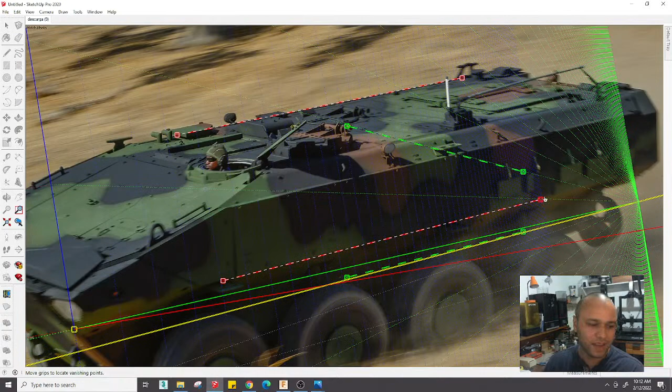Hi everybody, thanks for joining us. You're really gonna like this.

So two lines that you know on the model are parallel. So here, this line and this line, we know that in the real model are parallel. We also know, and it's also important, that they are as far away as possible. You don't want to, for example, use a line over here, because the photo match won't be as accurate.

Okay, so now with the green markers, we need to do the same with the lines that are 90 degrees from the previous one. So for example, I know that this one here, from this vertex to this one, in real life, this line is parallel to this one. The picture is a little blurry, but

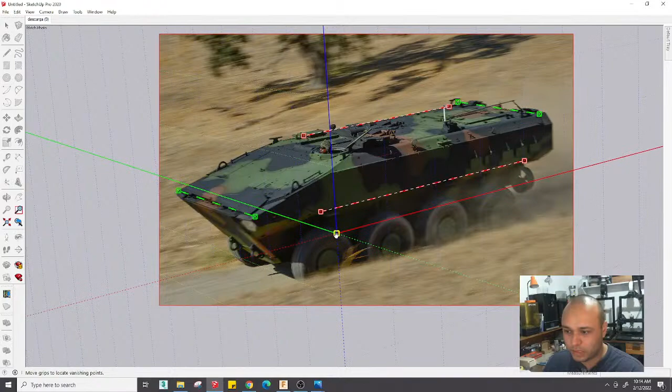The blue line cannot be adjusted. It is calculated from the position of the red ones and the green one. So this is really good, and this one matches here and matches here. It means we're doing a good job on the photo match.

So this is it for now, and this yellow point will mark the origin of the model. Let's set the origin, it can be here. Okay, click, right click, just done, and we're done with that.

So right now, this view on SketchUp is matched with the perspective of the picture. So when we start drawing here, the models are going to be on the same perspective. For example, let's start drawing this side armor.

It's a little too low. Well, the picture is quite blurry here. Let's check something else.

So for example, in this picture, you can see that the back of that plate is not at 90 degrees, so it has an angle. It's probably, for now, let's just assume it's that angle. We're going to check that later on.

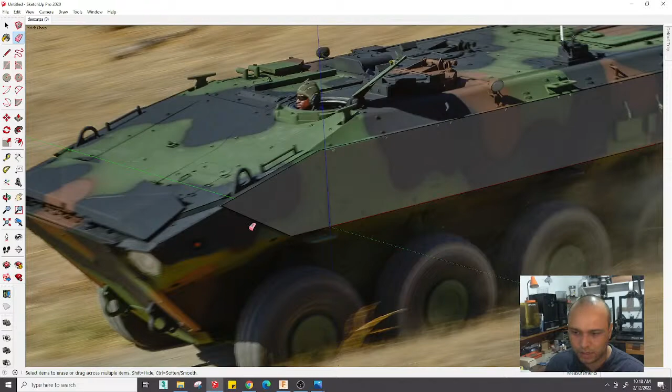Let's check if this face is on the same plane as this one. Let's check on the other pictures. It seems to be on the same plane. It only has like a division there.

Let's check other pictures. Yeah, it's definitely on the same plane. It only has, I think the interior goes here, and this is just an add-up. But whatever, we're gonna model the exterior part.

In this version, yes, this goes out a little bit. So we're just going to follow this line. And here, it starts, not on here, just a little bit on top.

Yeah, just like, not sure if you're getting that on the video, but there's a slight color change here. That's where the face actually starts. Okay, so this one is this.

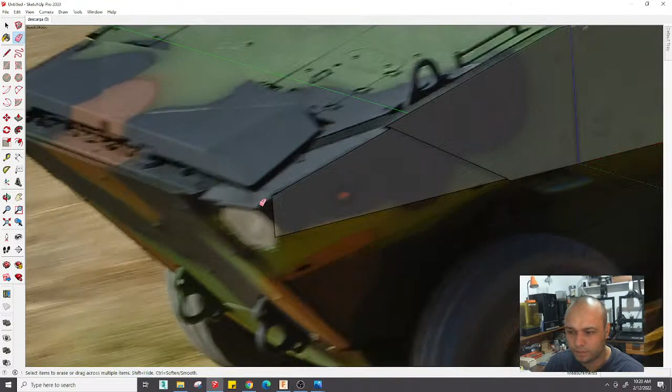So we may leave it like this for now. Oh well, let's just draw it and we can adjust it later. Okay, so far this is what we have.

Now let's extrude this way to the other side. Okay. And I'm going to divide it in half.

Right on the middle, I'm gonna make this a component. This will allow that any change I make on this side is going to be updated on the other side. For example, if I draw one here, it's going to be on the other side as well.

Okay, here it's looking good, so far it's looking quite nice. So let's finish this upper plate.

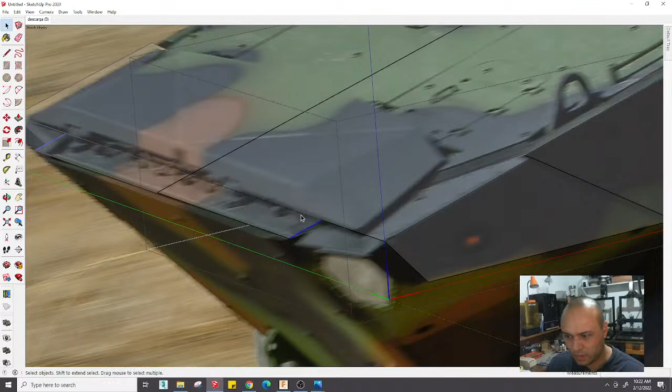We know for sure that this one goes this line up to there, goes here, and at least to here. Let's check on the other pictures how this detail works.

So as you can see, there's a little bit of a triangle. So this part is on a different plane. This one makes a little triangle here.

Yeah, you can see that in this picture. Check for another one. Uh, yeah, there's a triangle.

These little details matter a lot because they seem to be very small, but they're actually just the result of combining the big volumes of the vehicle. So they matter. So like I said, it goes here, so you want to make a triangle there.

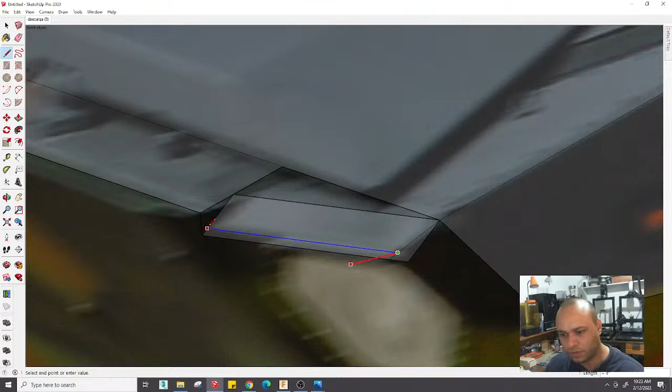And at the same time, this one goes to the inside. Yes. We're of course going to adjust, fine tune this on Fusion, because there we can match the geometry better. Sometimes, oh, I wasn't working on the component. Let's go inside the component.

So this one here goes down a bit. Okay, so we're actually going to draw this one. That one is this intersection. So it's looking great, looking good.

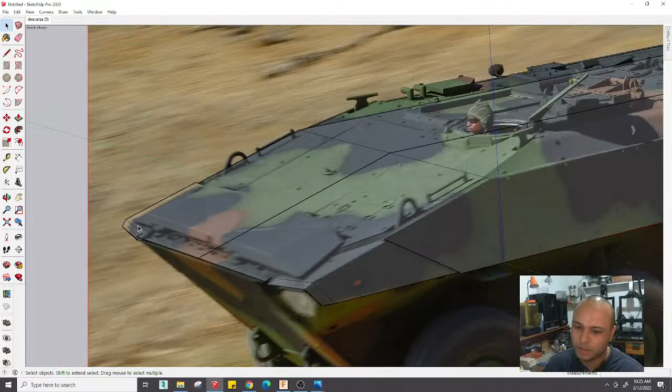Okay, now for the little bit of guessing work. Oh no, let's do something else first. So we have a major volumes done. Like I said, this little difference against the pictures can be do a lot of things. Let's try to make it work.

For example, if we change this one a little bit, maybe the center is off. I think that's probably it. I think the center is off.

I know it doesn't seem much. I totally get that, but it is really important to make that work, even for really small, really small difference, because the proportions is what matter the most on a model. To be honest, details are easy. Make these bolts and these hooks, these windows, all the stuff is easy. The hardest part is to get the proportions right.

So once we have a volume, we can start matching other pictures to see how good this volume is against the other pictures. So let's match a new photo. Say for example this one. This one has what we need.

Okay, so on the model, the origin, we could have changed this before matching the pictures. It doesn't have to be the same origin, but it's gonna work like this for now, so no problem. And we're still matching two lines that are parallel on real life. It doesn't have to be the same lines as the other picture.

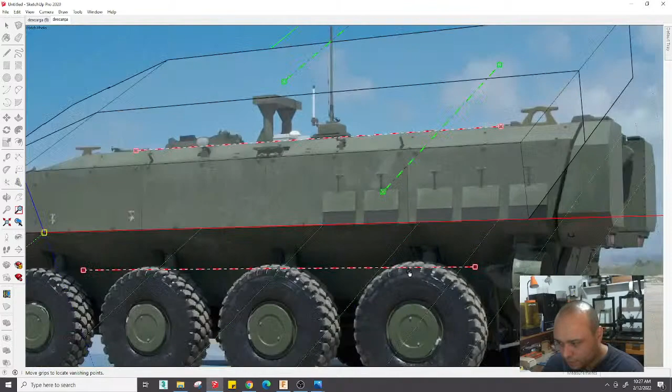If it is good, if it isn't, it's no problem. For example, I'm going to use this one. Not sure if you can see it on the video, but there's a slight color difference there. It marks where the two faces encounter. We can also use, for example, let's use the lower part of this, and let's use.

We could be tempted to use this one. It might work, but like I said, it's too close to this one we have. It's better if we put it all the way here.

Maybe we could start with this antenna, with this detail that is right here, and we can double check if we're good. For example, you see the blue line match the vertical antenna. That means we're on the ballpark. We're close. So let's match this.

Remember that this origin point was a little bit, we're going to see that on the image because it was a little bit back. So right now for the scale, we adjusted here.

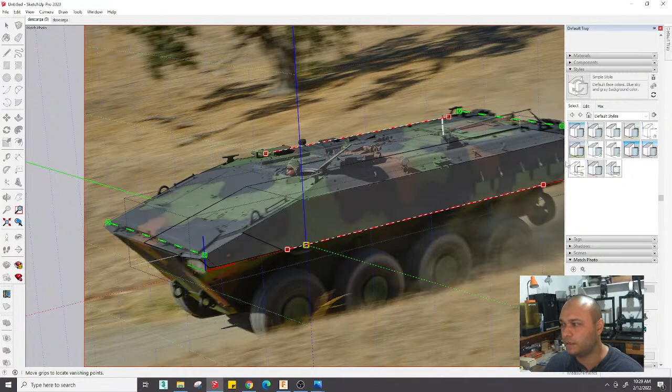Again, this is really a lot of guesswork. So you see, for example, this one, now we match here and here, we're still good. We're still good there. Maybe we can adjust the width of the vehicle.

Maybe we can adjust, we can adjust it like this. Sorry, like this. Oh, we're so close.

Oh, oh, SketchUp is in inches. Let's change that. As you might have seen, I'm not using any dimension. I'm just going for the picture. That's what is important to me right now. To get the proportions right, I will adjust the dimensions later, the actual dimensions.

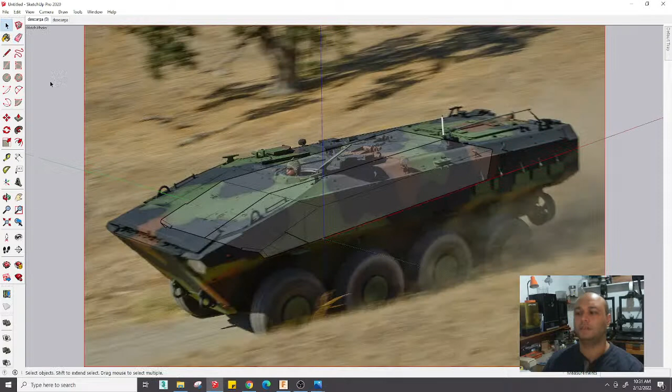This is just to get the midpoint. Okay. So we're really good here, and we're really good here.

Let's just... I think this little difference is armor plate that is there. Like I said, we're talking about a tenth of a millimeter on the final scale model, so it's no big deal. The proportions are really, really on point.

Okay, really happy with how it's turning out. Now we need to model the roof. Should be easy - the boxes on the back, the bottom, and the wheels. Just big volumes, no details right now.

Before that, let's add some dimensions. I got these dimensions from a military webpage. This is a prototype, so we're not sure where this was measured - whether it had this deployed or not, or if it's counting for this little backpack it has. So don't take them too seriously.

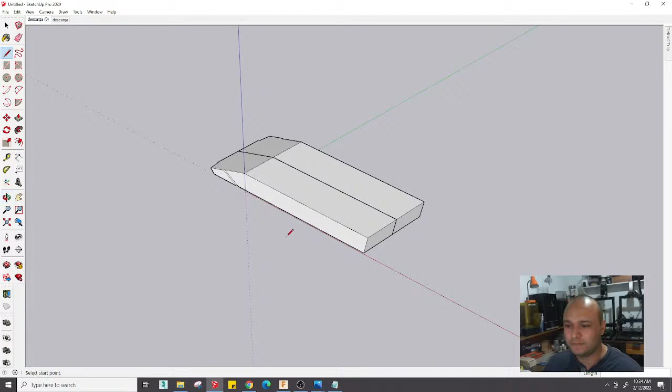The first thing that it reports to me is that maybe that 3.1 is without the armor. So let's discount a little bit here, and let's draw these volumes. Let's see how much we have now.

8.9 - this is great. Awesome, so we have this. This is just really great. Like I said, this is a very easy model because of the boxy nature of it. The real challenge is going to be the Ferrari Dino. So this is just a warm-up.

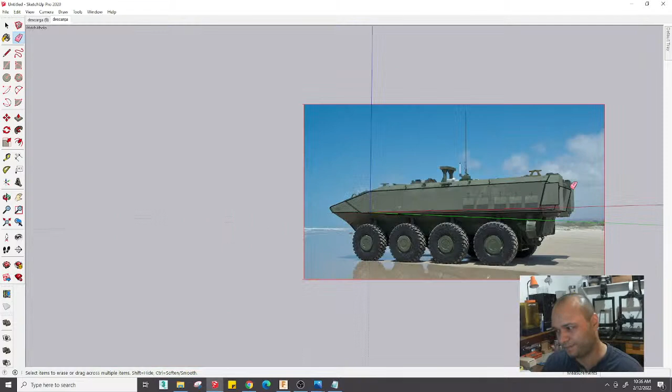Okay, so let's draw this one, let's copy it to the component. Oh yeah, almost forgot about that - preview one. Okay, save now, almost forgot about that.

This angle we're going to be matching it. We're going to match it with the other picture. But it's okay for now.

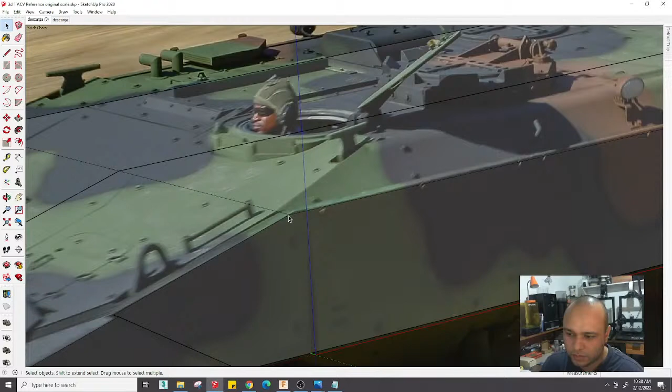So the roof starts - it doesn't start here, it starts here because of the armor plate. So how could we do this? Let's match this height. This line goes over there, and we're just going to move it in the green direction so we get a match. See how it looks - it's not bad, but we should match this face.

Okay, so we're here, we're good here. So probably the weird thing is this angle - it has a curve there. This is supposed to be like this, but this is a really painful thing to draw on SketchUp, so I'm just going to leave it to do on Fusion.

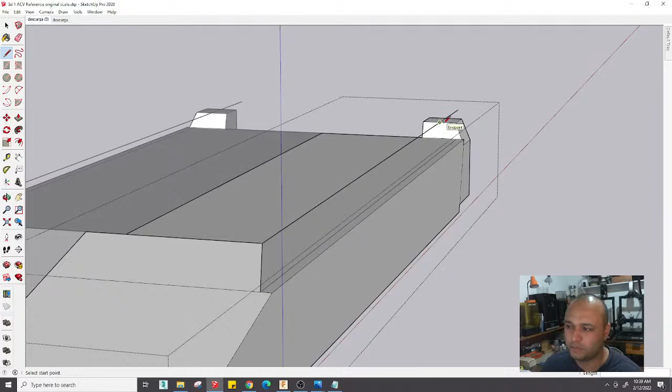Well, this is definitely too much. Definitely too much. This angle is way too much. I think we should be closer to this angle.

Let's check other pictures. Yeah, no, yeah, yeah, here it's more evident. Seems to be about 45 degrees, so let's use 45 degrees. Oh, so this one is closer - 45 degrees, okay.

Let's see how much we have here - 45, oh okay. So that was a mistake.

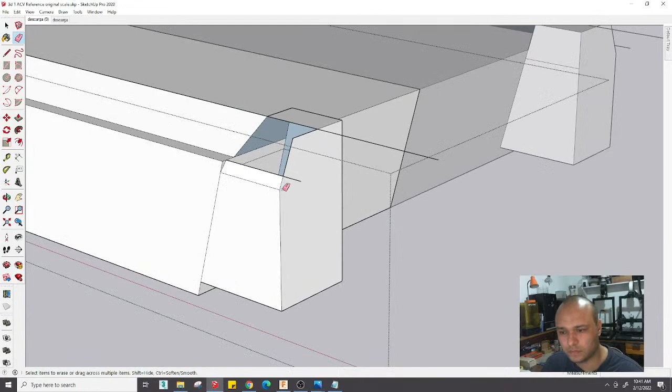Please remember all this is not actually the 3D printable model - this is just reference. So we don't need to lose our head here with these small geometry details. We just need to make sure it's as accurate as possible. All this SketchUp glitch is not worth the trouble to make it work.

So now this one looks much better, you see? You've got a small face there. Yeah, this looks great. And the difference we were seeing is that this is bigger. Okay, awesome, so we have that.

Oh sorry Toby, I haven't checked the question. No, this is - we're just doing the reference model here in SketchUp to use the photo match utility. Once we have a reference model on SketchUp, I'm going to use that model as a reference in Fusion and actually model it again using Fusion. But since Fusion doesn't have this photo match utility, I don't see how I could do this on Fusion to photo match a perspective. I don't think there's any way to do that. If someone happens to know - I'm pretty sure there isn't. So far this is the best workflow I've come up with.

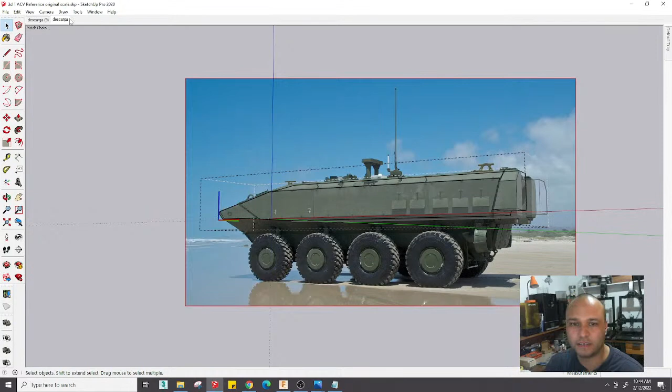Okay, like I said, this difference is really hard to fix because this portion of the image is so small that any change on the guides is going to make a big difference. So it's not worth losing your mind over this. The important thing is that we're getting proportions right between pictures.

So now let's go to the front. The front is the one that we're missing. Let's see a few pics here - that detail.

On this picture, the vehicle seems to have an add-on. I'm not sure, but it seems that the real plate is on the back, and there's another armor plate here that makes this part longer. So I'm not going to use this picture for reference.

This one is blurry, but you can see that the plate is an add-on, and the real line of the body is on the back. Also, you can see that it has a little bevel on the front plate, and this picture is more clear.

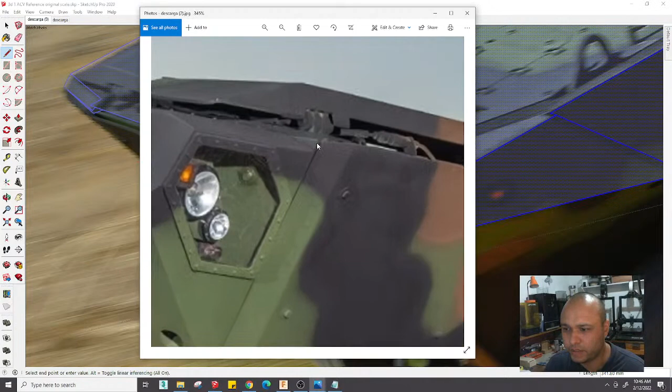So the triangle that we were speaking of before is here, and the armor plate is in front. So this little triangle is actually this one. I really don't want to move anything here, so I'm just going to move.

Whoa, whoa, whoa, move this a little bit here. Everything is still matched. Okay, so like I said, that triangle is here, and that triangle finished with this angle, the angle of the front armor plate. Right now it's just a random angle.

So let's calculate this angle somehow. One thing we have for sure is the midpoint here and the midpoint here. We could draw that, we just find the midpoint here, we already have the midpoint here. It should be a little bit back, and that line will be the angle we need. So let's do that, let's go below here.

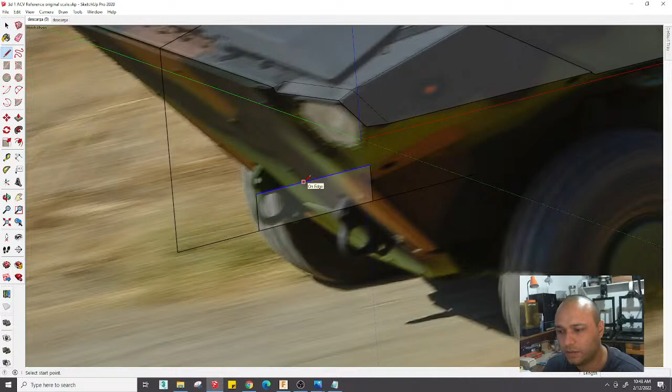Like I said, this involves a lot of guesswork. Right now I'm trying to imagine a line that goes from here to here. The intersection of that line with this one should be in half, on the midpoint of the new line that we need. Like I said, it's a little bit on the back because of the armor plate, so I know this is kind of hard to explain.

Well, of course you're seeing 20 years of experience in this little detail here. It involves a lot of, I don't know how you say that in English, geometry, analytic geometry, to get this guess right. But that's the way it is, it's a little bit of guesswork involved, a little bit of imagination. But the important thing is that we get a start point of this angle.

Now we can check the other picture. Well, it's not actually this one, but this one is also at that angle. Maybe we can check. It's quite close to this one, you see? Seems to be right.

The real test is for us to match this picture with our model. Let's try that. So like I said before, you can place your UCS, your origin, anywhere on the drawing. We're gonna place it here. Let's try to keep it on the same direction. And let's start a new photo match.

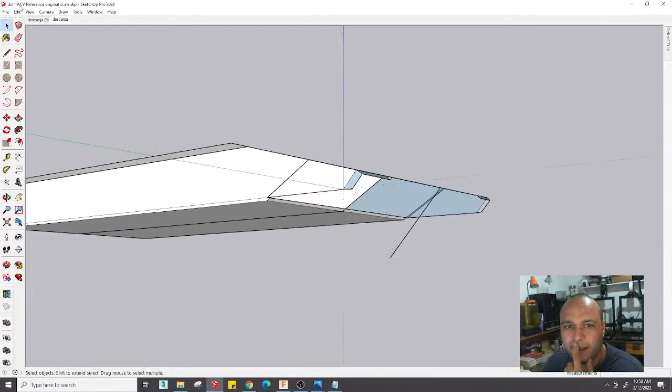Like I said before, like it is on the description of the video, these videos are going to stay online for a while. So if you can't catch it right now, it's no problem. It's just my way of work is like this. I like to just sit down and work for 5 straight hours. I don't like to take too many breaks because this is a lot of mental work.

So you do get tired, but also you feel like you're in the zone at some point where all the photo is matching, all the geometry is working. So you just don't want to ruin that moment.

So I just want to focus on this part. Like I said, this is really hard to get right. It's very, very, very difficult. We also don't know if the picture was cropped, we cannot be sure about that. But we're just trying to make it as best as possible.

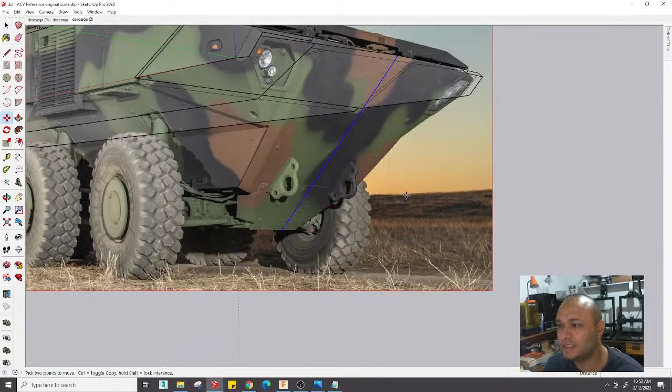So this is quite good, quite good. Okay, so there. Well, it seems that we were almost right. You see, all the bolts are pretty much at the same. Yeah, this is definitely going to work. Let's just adjust it a little bit just to get it perfect.

You see, the difference is 0.5 degrees, so it's really not much. But like I said, for the model, all those little proportions matter a lot. That can be the difference between an okay model and a really good model. So this angle is the same angle here, and it's the same angle here, and of course it's the same angle here. So I'm just going to erase this.

Oh, I wasn't drawing on the components. No problem, it's no problem. Okay, let's erase this one. Let's do the same as before.

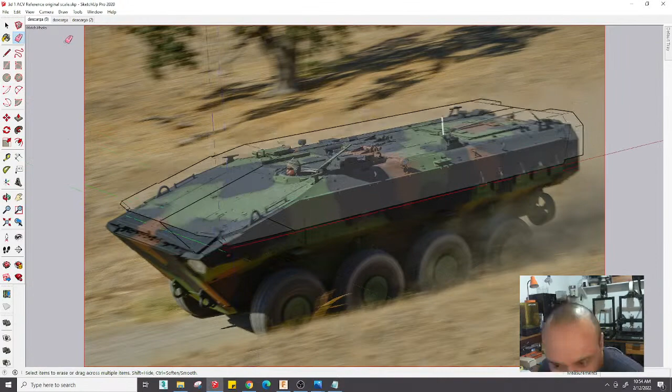It is match. Good enough there. Really good here. So there you go. It's quite nice.

It might be a little bit too small, so this just means that this cut is a little bit to the back. Let's just do that.

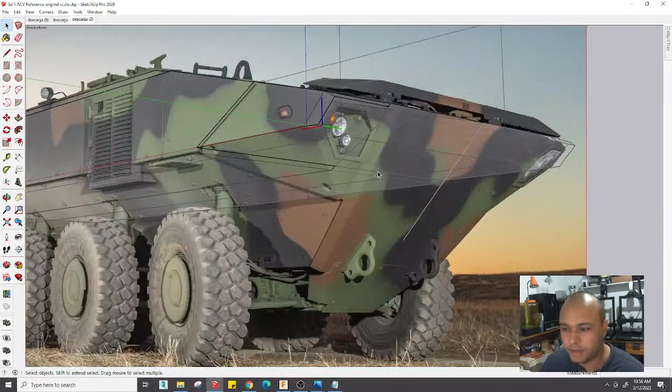Okay, we have lost that one there. Let's just repair. Okay, now it looks great. Okay, so let's keep going with this.

Remember that we were on the back, so the line is this one. So we have this point here. Check it out. It has a little bevel here. So the face actually starts from this point. You cannot see it that clearly here, but it's from here.

Let's just mark that. And it should be the same face, right? All that should be on the same face. Okay, so this is what we have, what we need. This point here.

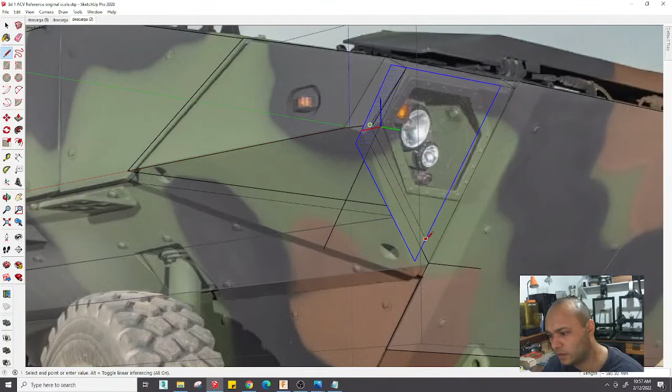So this point here is actually this one. The difference is just a matter of the photo match.

So okay, now we can draw the next face. That is just going to be this one.

Body has to be on this plane, so I'm just going to extend this plane, extend this line. There you go. It's really nice.

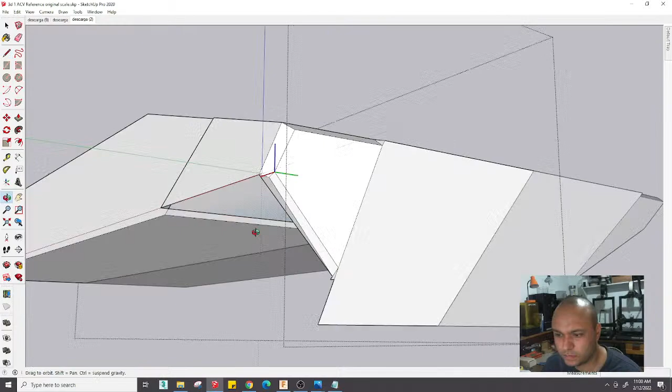Let's not worry too much about this one. Let's do the bottom, that's more important. So we know that this one goes here. This one goes all the way there. This one goes all the way here.

Okay, and we're going to start this one from here. Oh sorry, wrong direction. Okay, we're going to adjust that later. We just need to check this angle.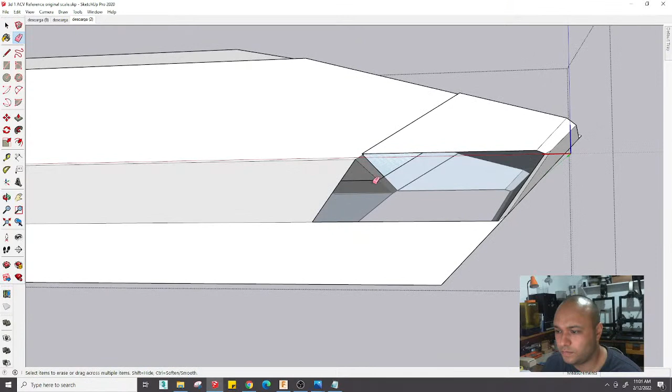Almost done. And we also need to solve this geometry here. It's really not that important because like I said, we're going to actually draw this again on Fusion, so it makes no sense to put that much time on this. The important thing is that we need to have a face here. That's it.

And here, you're just going to continue this angle, close here, copy this to make the plane, and draw the intersection. Let's clean up this a bit. And we are done with the basic model.

Okay, I'm just going to finish it all the way here. Oh sorry, wrong direction. Sometimes it's hard to draw in the same direction, so just copy it that you know is on the right one. And that's it.

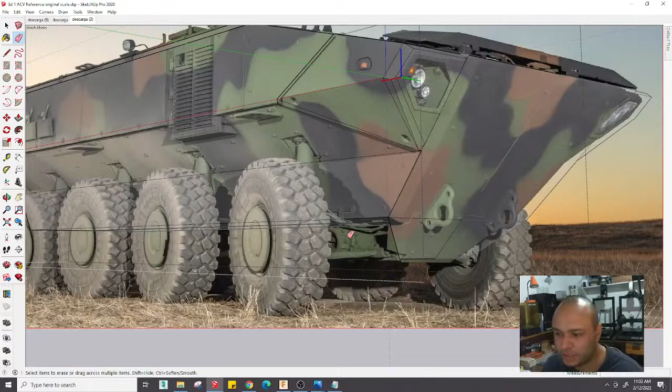The final model won't have this many details. It's going to be a model for wargaming, so let's just see how much detail we can put on the suspension.

So there you go. This probably doesn't finish like this. I need to see more pics. But for now, it's quite good.

Now I just like to put some markers on some details that I know we're going to need later on for modeling. Again, this is just reference, so this is to have the position correct.

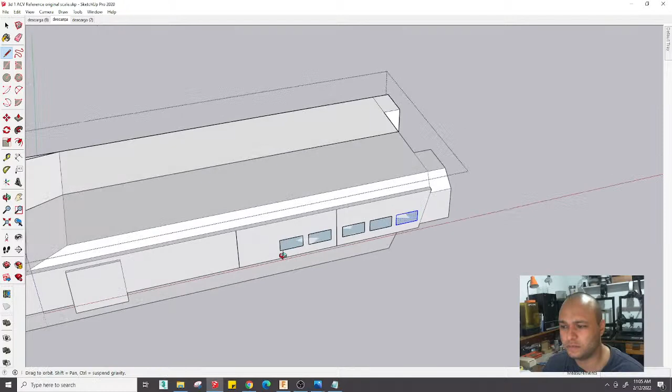For example, maybe these windows here, the armor division, that's important too. Oh, I'm working on the wrong side, sorry for that. And this one is not on two sides, so let's fix that.

Okay, now it's working, it's good. As you can see, there are some variations on the side armor. I think I like this one. So it's pretty much on top of each wheel, except for this one, it's a little bit behind.

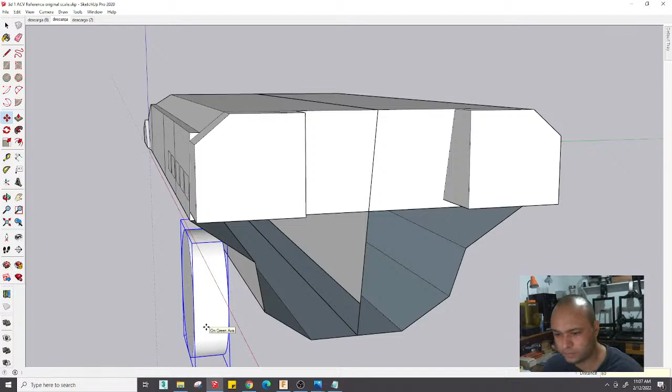Mhm. They all seem to be on the same distance, so it's working quite nicely. Oh, sorry. Yes. Mm.

So this is pretty much it for now. Of course, this model can have more details added later once we're modeling, in case I need the position of one detail, maybe the colors here, not sure. But for now, this is really good, really, really good. Really like it, how everything matches.

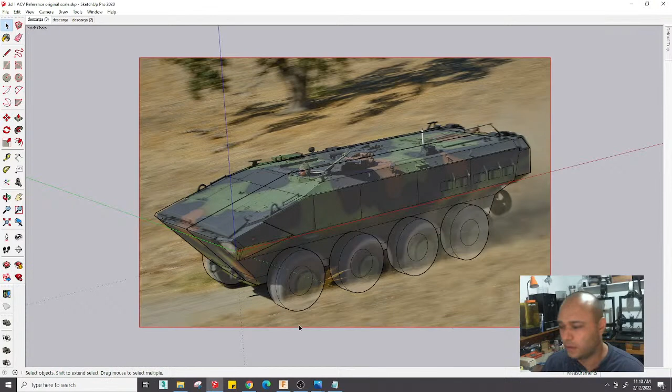Okay, we're 1 hour in. I think this is a really good result for 1 hour of work. This is going to speed up the modeling in Fusion a lot because we won't need to go back and forth from pictures. So let's start with the Ferrari. That's going to be a challenging model for sure.

Save, template, millimeters. Okay.

So for the Ferrari, let's look at the reference. This was one of the reasons I picked this model, because I found this collector web page that has these awesome pictures of this vehicle, so we won't have the same problem as with the ACV, where we weren't sure which version we were looking at. This is the version, and all the pictures correspond to the same vehicle.

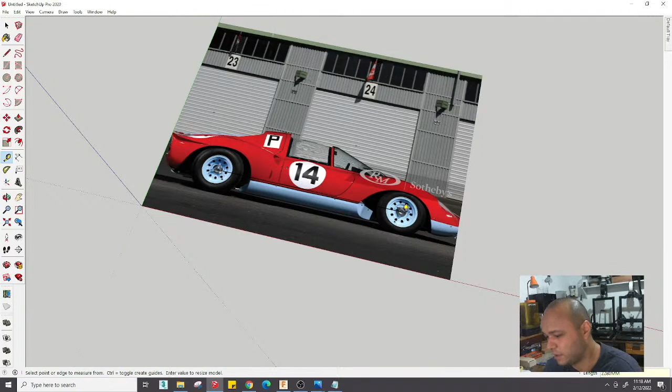The wheelbase is 2,280 millimeters. So let's set it to 2,280 millimeters. There you go. Now let's just rotate.

Now we're going to draw the wheelbase. The front wheelbase is 1,392 millimeters, but we only need half. So this is the front wheelbase.

And the rear wheelbase is 1,414 millimeters, we only need half. So this is the other wheelbase.

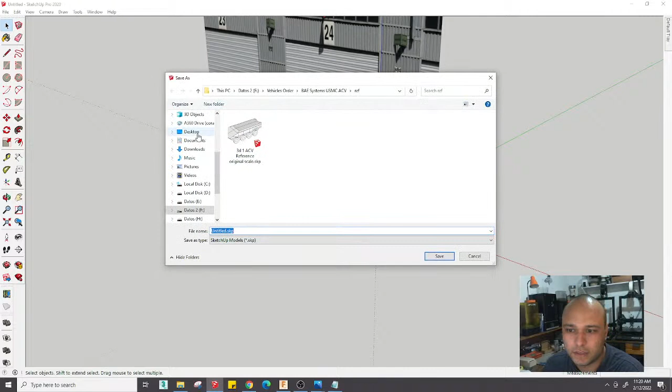From these pictures, we are going to scale them to each wheelbase, and use them as the profile of the bodywork on that plane. It's going to be clear later on, so let's just do it, and let's save this model.

As you can see, I have already done this because I really didn't want to be too confused for this explanation, but we're doing it from scratch anyway.

Just try to pick the one that is most at front. This one is a little bit too high, so this is almost perfect. If I were taking this picture, I would have gone down just a little bit more, probably to the same height as the middle of the wheel, just to get as perpendicular as possible to that plane. But this is going to work just fine.

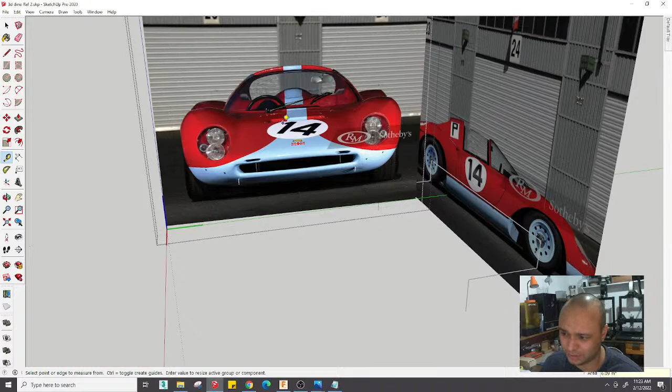Let's make this a component so we can scale this picture only. We are inside the component. So only so you can see it, if I put a dimension here, it's going to resize this. So let's put the right dimension, that is 1392.

And now let's grab it by the middle, put it in here, so that matches quite nicely. As you can see, we are concerned only with this line, this is our main concern, and it's pretty much a match, super close.

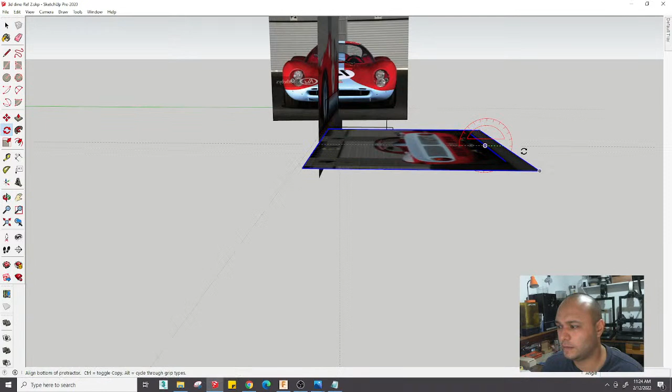Now let's do the same for the rear. Exactly the same, just add the picture, we draw a line from the mid to the mid wheel here, make it a component, put the right dimension on it, and align it with the other one.

So this is great. The only thing is, well, it doesn't really matter, this picture is reversed. It doesn't matter, the car is quite symmetric.

Okay, now that we have these two, let's proceed to do a photo match. Let's place our axes at some point that we know, so it's going to be right here on the top of the door, on the middle of the vehicle. Now let's do the photo match.

Okay, this is kind of hard to see because other pictures don't allow us to see, so let's hide these ones. Now we can do a photo match. Remember, these points should be on the middle of each wheel at the floor. So far, that's what we have.

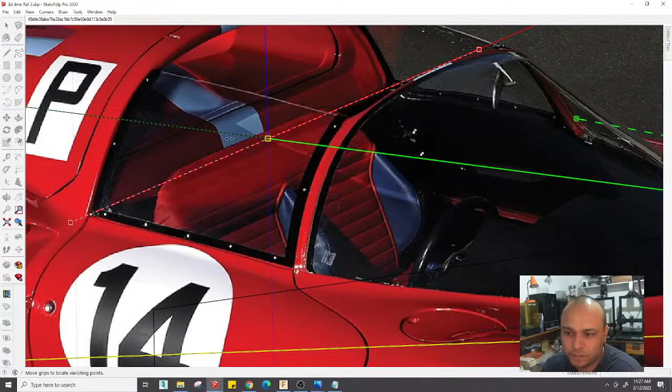Now let's start the hard part. This red line should also be on a line that is parallel to this one. As we said, we can use, for example, from this one to this one, or maybe check. Let's better use this one, it's more clear, it's not so clear here which one is. But I think I see it now, it's this one. Yeah, this one is from the back.

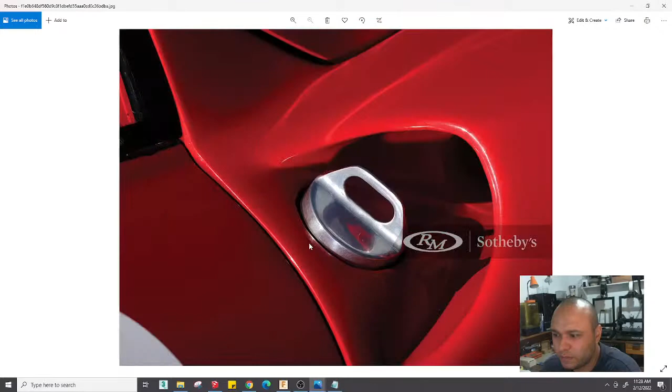And now the really hard part, the lines that go in the other direction. Let's start the guesswork. I was seeing a few artist interpretations, so for example, this line is quite straight, and it is like that on other artist interpretations of the vehicle. You see, this is straight. This is a racing version, but I think it's pretty much the same chassis. Also here, you see that line is horizontal. So we can assume that the mid of all this plane, the right middle from this middle to here, is at 90 degrees. So this should work.

Okay, now we need to have another one as far away as possible. We could use this one from this same point, right? But we know that it's not like this, it's pretty much like this. Oh, we have a problem here.

So the problem is the following: I was using the red ones in the wrong direction, so it should be the other way around. We might as well start again because this isn't going to work. So let's start again. The red ones go here, and the green ones go like this.

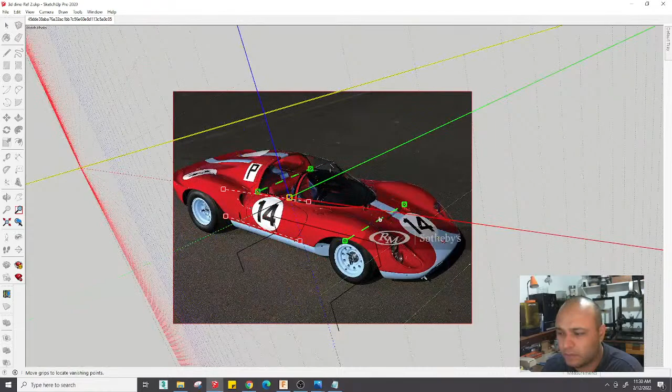I'm just doing it again, that's all, because the model was at 90 degrees, and since I don't want to have to redo the image again, I just started it over. But it's the same explanation.

So from the midpoint here to the midpoint here. Okay, so this red one, as you can see, these lines should be on the middle of each tire. So about here, we're so close. This one is good.

I think this one is a little bit off, just a bit, so even the small adjustments I'm making aren't quite right. We can also check that with the pictures, so let's hide this one. Oh, this is really good.

As you can see, this is almost finished here, it's pretty much a match. I think it's a little bit high, and this one goes, this should be here. This one is a little bit low. Well, it's really good enough.

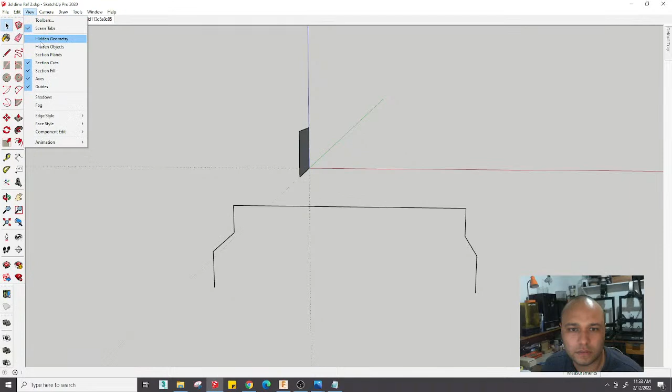So we'll start to draw a few geometry. The first thing I'm going to draw is this plane here. On the picture, we can have this as geometry. It will make things much easier.

Oh no, let's just not do that because we're going to lose it. I think there's a way to change that in the view settings, but I'm not going to mess with that right now. Okay, so let's just draw this here.

Remember that this is just a reference model, it doesn't have to be perfect. I mean, we're trying to make it perfect, but it doesn't need as much detail. So it doesn't matter if this line is segmented, it's no problem.

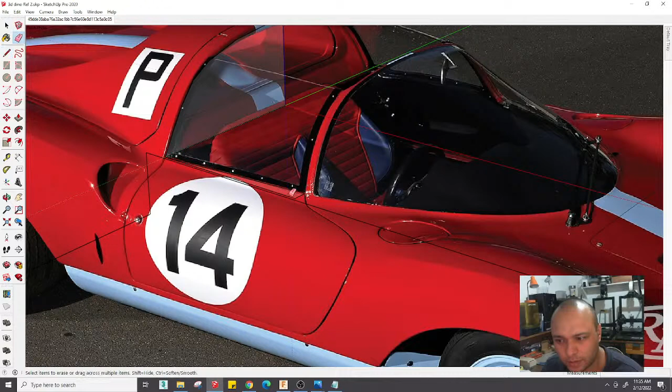So let's try to match. Okay, go. Now let's draw this one, that, like we mentioned, is converging forward.

I don't think this one goes all the way here, because it says, or maybe it is, this is just a cut. Yes, it's great, let's start it.

In a complex model like this, it's even possible that I might have to go to Fusion, draw some surface, and get back here to make the match. It's a possibility.

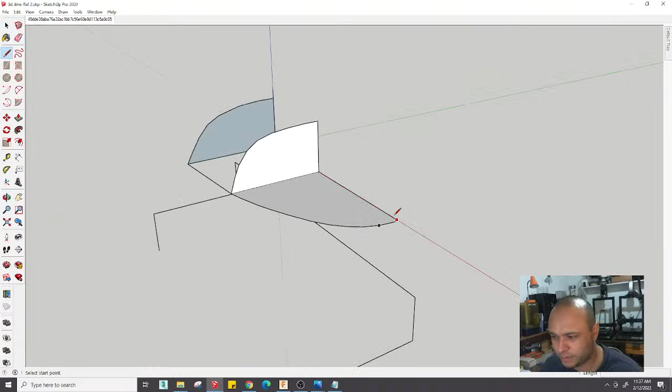Like I said, it doesn't matter if it's segmented, this is not going to be the actual geometry we're going to manufacture. But there we have it, our first geometry for this vehicle, for the reference of this vehicle. So far I like it.

Yes, it makes sense. This is just to have a reference there for the glass.

So this is really good. This is where we can take from this view. As you can see, the photo match was on the cabin, on the cockpit. So that's done.

Let's keep working on, for example, this line here. It's really important because that line is also a section of the vehicle. Let's double check that. Yes, the line is a section of the vehicle.

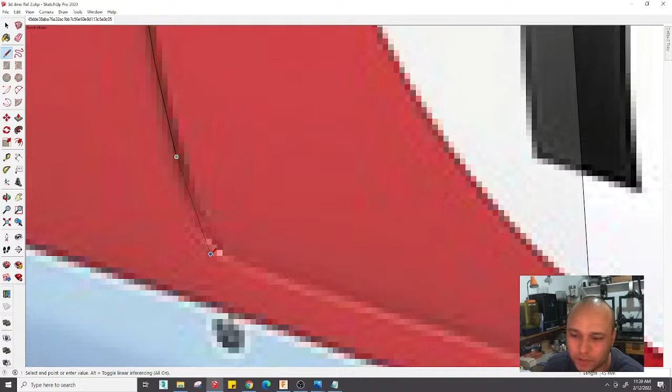Well, there aren't many people watching right now. It's no problem, I know this is a really complex topic and it's a little hard to follow. But like I say, this is going to be online for at least a few months.

I know for sure this is a really advanced topic, so I really hope that whoever is really interested in learning takes advantage of this.

So I'm not liking what I'm saying right now. I guess the section is not an actual extrusion, I'm pretty sure it isn't. Oh, you see, this is what you need to have a plane to draw.

So how far should we go in this one? Let's see.

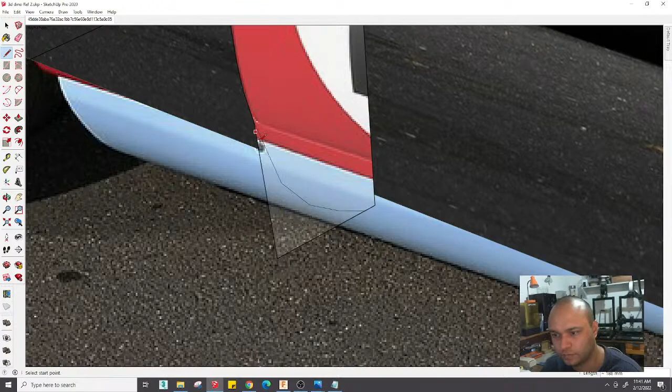This one. So we weren't that far off. It's even really good. This looks much better, much better. Actually, yeah, this looks much better. Let's see if we can find another vertical line or something.

Look, in this picture, it does seem like these lines, at least on the chassis, they seem to be parallel. On the artist's interpretation, hard to tell. At least the door seems to be straight. I see this and I see a straight door. So it should be like this.

But it doesn't seem to be working. So probably straight but not parallel to the other. So like this makes more sense. Something like this. Yeah, up to here. Yeah, something like this.

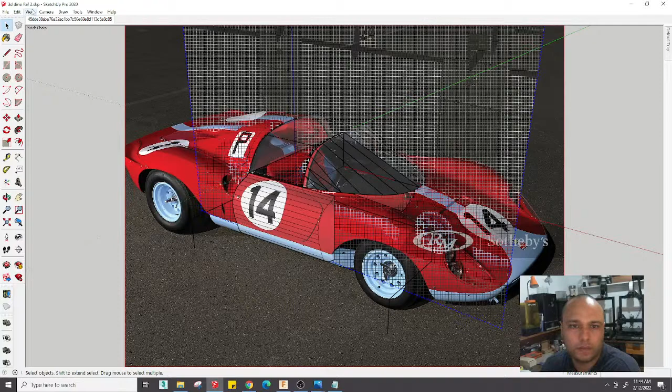Looks good. Let's make it a component. Let's mirror it just to have a good reference. Let's see how far off we are. Oh wow, this is not bad. Not bad at all.

Seems to be like these two curves are too wide on top. Maybe that's true. Let's check with the front pictures.

So yes, they do seem to be a little off. So let's fix that. Remember that in this picture they are a little bit behind the actual plane where we scaled the pic. We need to make it bigger.

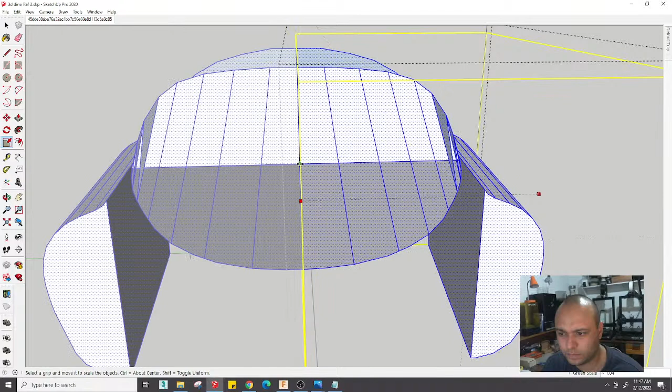This is really, really good. You just need to fix this one. Something like this. Seems to be closer to the real shape.

Okay. Maybe not as — let's always check something here. So this is actually a little bit tilted. It's not like this artist interpretation. So that's why it looks weird.

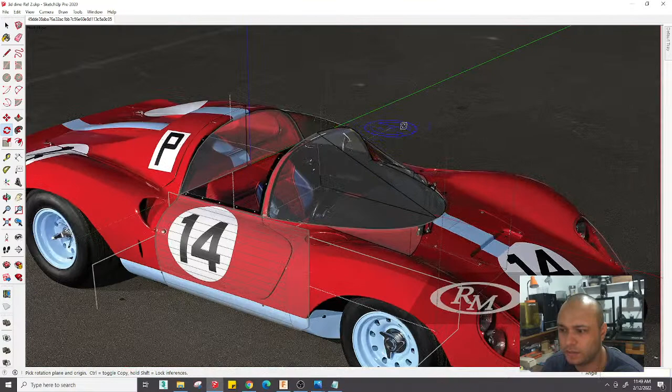See? Oh, this is perfect. Let's just give it a 5, 6, and this is so close. Okay, yes, this is perfect. Really, really good. Actually, the first one was not this good.

Okay, so we have that now. The cockpit is pretty much done. Let's work on other details. Let's work first on the rear light. On the rear light.

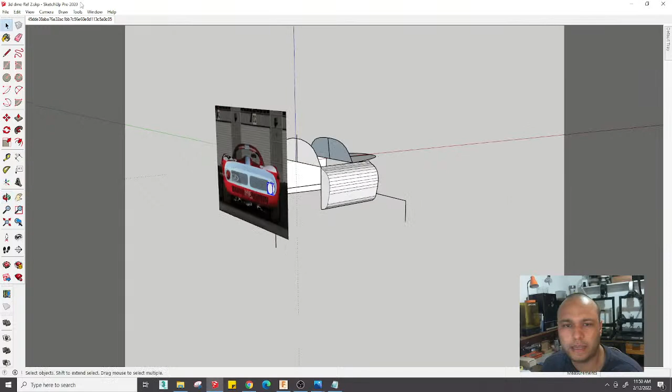Okay, let's just drop them here. Sorry. Why is not this? Okay, here. Okay, nice. Okay, and now just going to match it. This...

They do seem to have a little bit of an angle, so that's super important. Let's see how far off we are. Let's put this one. Okay, so that is the rear headlight, the rear brake light. Sorry, brake light. It seems to be on the right position here.

Okay, let's just do another detail. For example, let's do the wheels. So for the wheels, for now, I'm just going to draw some big cylinders — it's going to be it for now. There were actually dimensions for the wheels. We're here, I think. Well, now I'm just going to take that from the pictures.

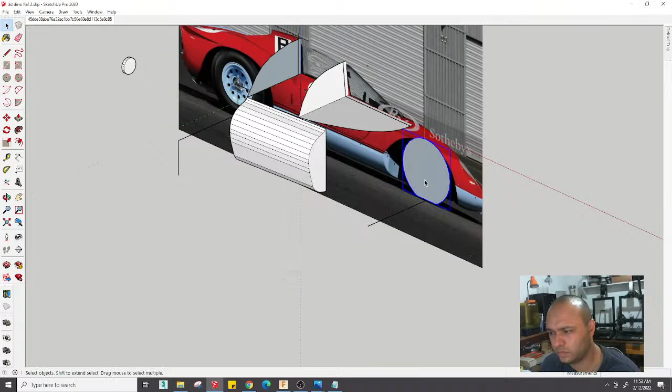So the difference here, of course, is that the wheel is on the ground. So it's a little bit flat there. Oh no. Okay. So the wheel must match here. And, oh, this is really good.

And it matched so close to the other picture. This is really, really good. Okay, let's do the same with the real wheel. Let's check the dimensions. Sure. Yes, good.

So let's make this the right dimension. Let's make it unique. Oh, this is — sometimes I have to use a window material just to see the back of the window, no, glass. Yes, this. So I can see the back of the model on the back, because this one is here.

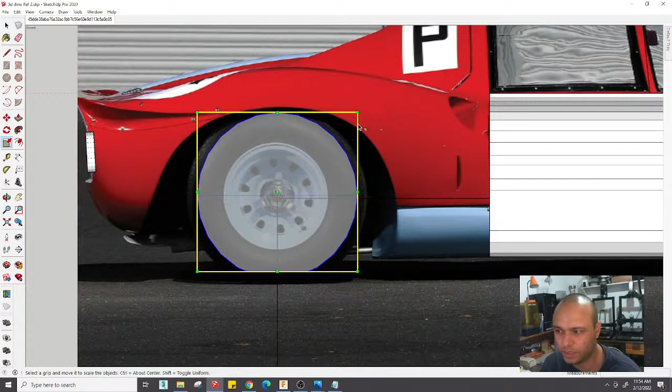From there, you can scale it up and match it. Let's make sure the midpoint. And of course, that wheel is much wider. Well, this is not looking super great.

Please remember the wheelbase also depends on the toe of the vehicle. That's a few things, but 7 millimeters is a good match. It's a really good match. A small difference there.

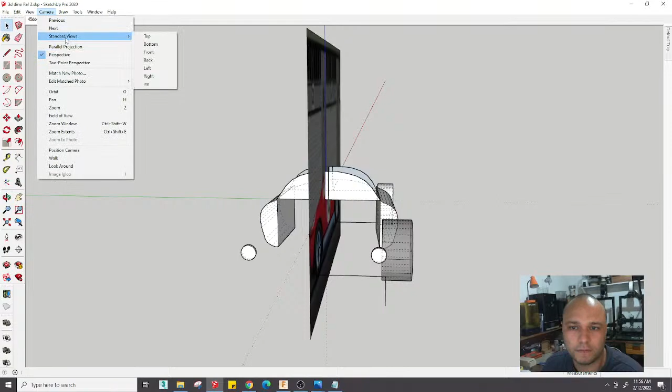Not sure if it is this wire. We're going to match that later. But it's working. We can double check with the image — that was the reference. So we don't need to check that. Let's keep going.

Now let's match the — let's just draw this line here. Okay, let's have some. Let me show you the one that I was making before. It's pretty much the same. Let's just copy these two. It's really good, the fact that they just match. Align them.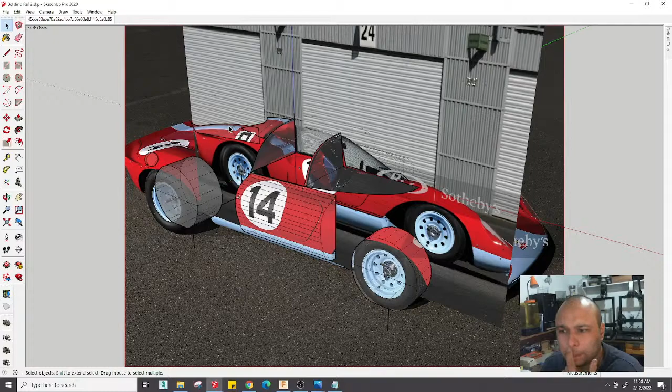Okay, let's double check everything. So the problem here seems to be with the center. Okay, this is better now. So this was just tracing the pictures, no big deal.

Okay, the lights. Now for a little harder one. On this particular model, we have these crease lines on the top of each wheel. It's a very important detail of the vehicle, this crease line. So we're going to try to match them with the photo match. Let's do that.

Okay, first let's hide these ones and just trace them here. Going to trace them.

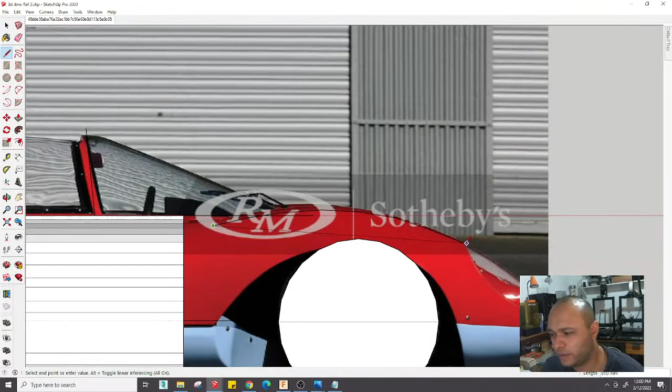You can see there's a little slight color difference there, that's a crease line. Okay, and let's trace this one too. It starts from here. It doesn't go all the way up, it's a little bit lower. And let's just close this and close this so it's easier to manipulate.

Okay, now let's try to match them here. Okay, this one is pretty much a match. I think we need to rotate it in this direction. And this one is close here. I think we need to rotate it in this direction too. Very close, very, very close. And let's see how it's working on the right.

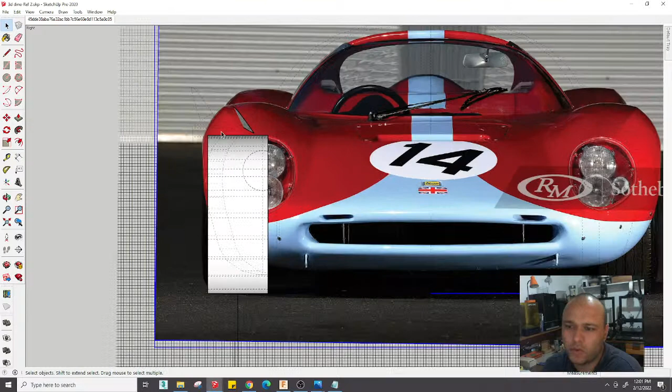Oh, so close, this is great. This is the thing for the front, this is perfect. And now let's do the same for the back. Quite close. It's going to work for that. It's good enough for now.

Okay. Seems working quite nicely. This is working quite nicely.

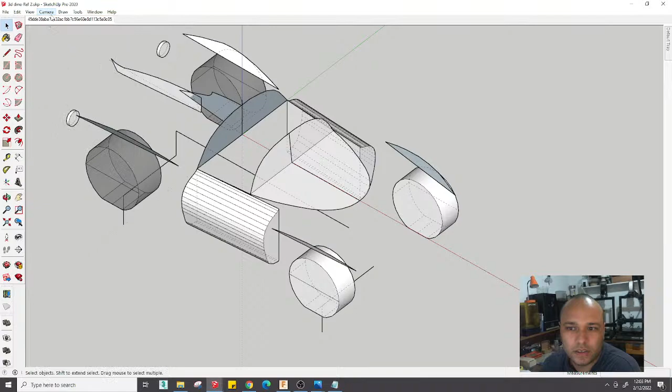So we are 2 hours in on the live. I mentioned that I do like to model more, but like I said, you also get mentally tired really fast. So I'm going to do just a couple more details.

We're gonna leave it like this. Yeah, it's working really good, it's working really nice. Just have this, the top here.

Okay, the other detail we're gonna work on is this profile, this line here. It's really important. So let's check the pictures and see how it's related. So it's not perfectly straight, so we have to keep that in mind, and it's a little bit below the axle line. We can work with that.

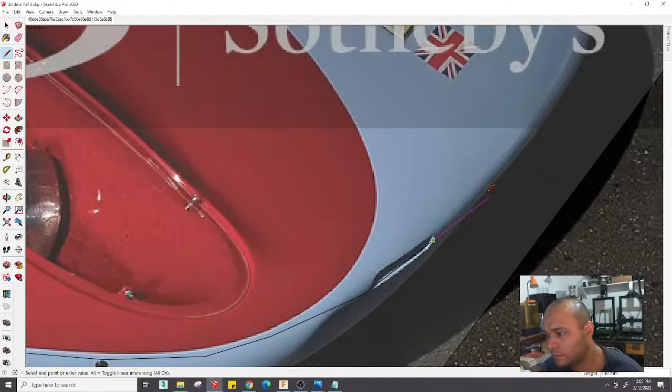So a little bit below the axle line, that's what is going to be our plane to draw. We'll start here. Just erase all this. It's in place. That's really good, that's really, really good.

Let's check with the... yes. This difference probably is because what we're assuming is the mid of the vehicle, the half. So because of perspective, this probably explains this difference. It's a little bit too big, so I'm gonna fix that.

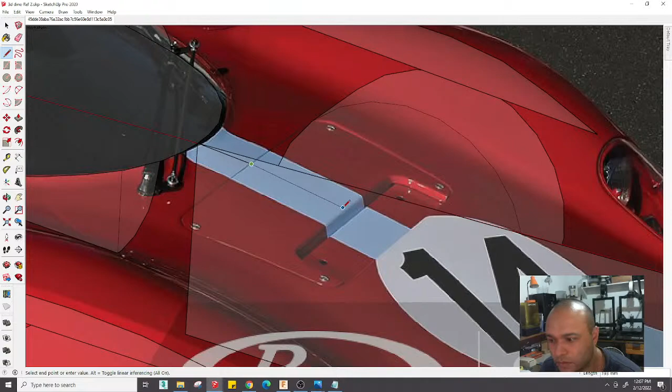Now we can draw the middle line that goes from here to here, again using the photo match. So let's draw a plane. This line should go pretty much right on the middle of this band. And finish.

Wow, it's way too big, it's way too high, right? So we'll check that. Oh no, okay, so the difference we're seeing is this one. It does need to finish like this.

Maybe just a little bit. Let's finish this one here, make it a component. And let's add this picture to the model.

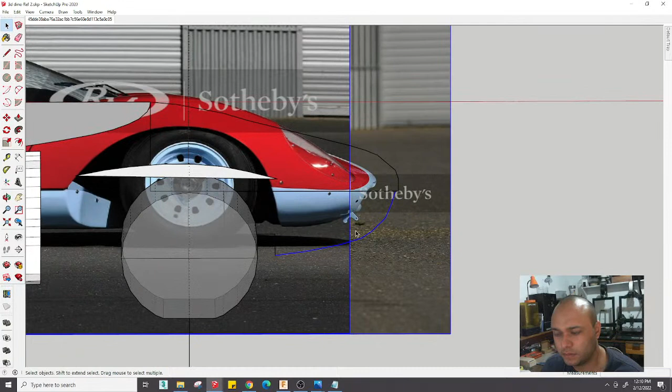It might be a little higher, but definitely not as it was. So let's hide this one, this one, and we're just going to follow this line. Yes. Have to be somewhere in between, you know, have to be somewhere in between. So I guess something like this would work.

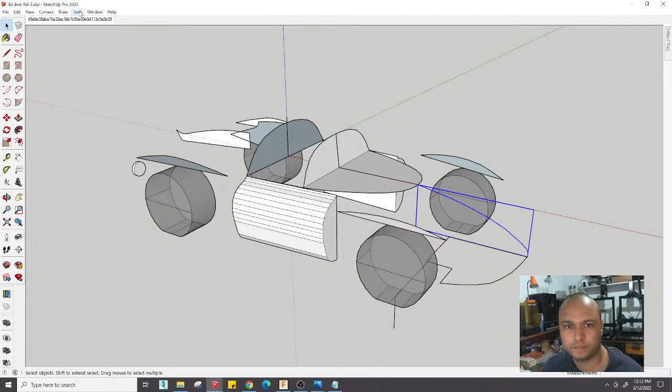Now for this line to show up on Fusion, they need to be at least faces. So let's just... okay, so there's a line that is heading. This kind of stuff does not happen with Fusion 360, so that's what I like.

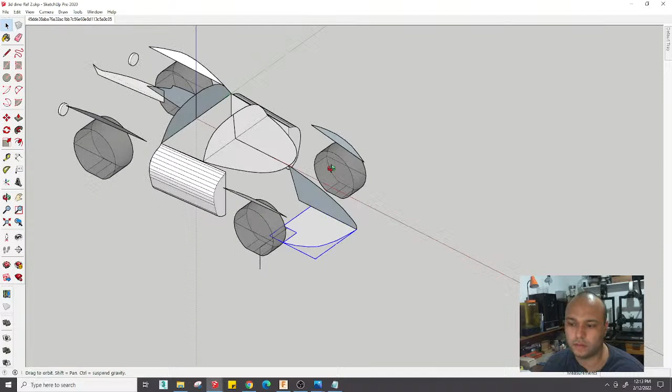Okay, we're gonna leave this session for now, this is it for now. This is some really good progress for an hour or two, really, really good.

Next session, I'm going to place the headlights, place some other details, maybe this grill here, stuff like that. Maybe the air intakes and the lines of the mud guards, those are really important. And then I'm going to import the model into Fusion and start actually modeling the final 3D printable model.